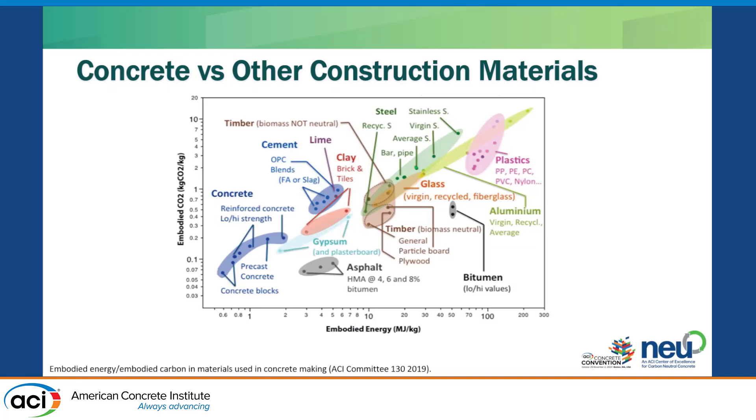So concrete, right? Compared to other building materials, other construction materials, if you look at embodied carbon on the y-axis here, embodied energy on the x, so how much it took to make it, concrete and cement are pretty low relative to some of these other materials. I think a lot of people are often confused by that. You see that and you say, oh, maybe it's not so bad. And of course, we all are here for concrete, right? So pro-concrete, but it's kind of interesting to look at that.

But when you consider that we're producing lots and lots and lots of concrete annually, then the carbon issue becomes big, right? This is global Portland cement production from the 70s through more recently. You can see it's increasing, bouncing around a little bit, but it's really high, right? Over 4 billion short tons of Portland cement, and this is just cement, making up maybe 12% of concrete. So that's a lot of concrete that we're continuing to produce.

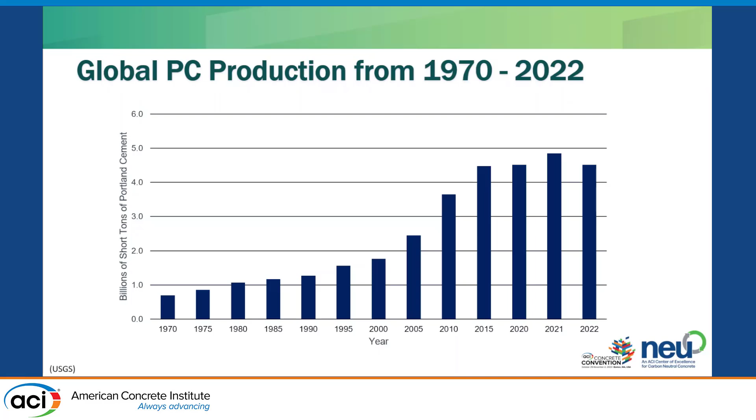So the carbon footprint, you hear between 5 and 8% of global anthropogenic CO2, and that's an issue. If you look at specifically what the materials are in concrete that are causing this high carbon footprint, Portland cement, of course, is one of the highest ones, right? Compared to some of the other materials like metakaolin, slag, silica fume, etc., the aggregates, air entrainers, some of the other admixtures can be a little bit high, but Portland cement is largely the biggest target that we should be going after.

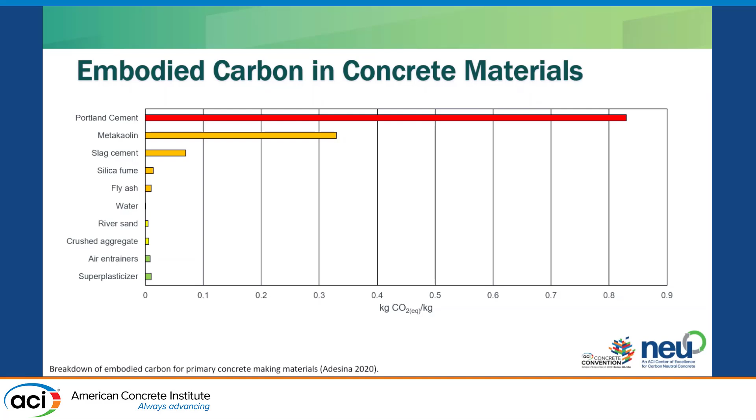So one of the questions you kind of have to ask yourself if you're trying to look at Portland cement and trying to reduce that carbon footprint is, where does the carbon footprint come from, right? Specifically, in the production of Portland cement, I think probably most of us know what this kind of situation is here.

So, typical cement kiln, right? We have raw materials coming in on the left, namely limestone or some form of calcium carbonate, shale, clay, various other materials. Now the kiln is at an angle, rotates real slow, and there's a huge flame at the bottom, right? So as the materials go through, they start to heat up. You lose the water, eventually the limestone hits a certain temperature, and you start to lose the CO2 from the limestone, right? So that's just sort of a natural chemical reaction that happens when you heat limestone, but it contributes a significant amount to the total carbon footprint.

In addition, those materials inside that kiln need to get to roughly 1,450 degrees C, which is very hot. So we're burning a lot of fuel in order to keep that flame at the temperature it needs to be. So those are the two primary activities that are responsible for that carbon footprint.

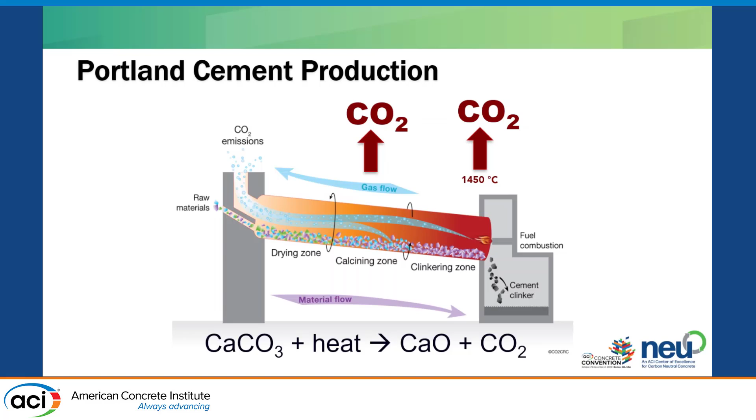Shrika mentioned earlier, there's all sorts of people on the case, right? We have ACI, PCA, all the letters working on this, which is good. And if you go online, which I have been, I'm working on this document, I'll talk about it in a few minutes, there's all sorts of roadmaps. Very cool, and a lot of them are generally heading in the same direction.

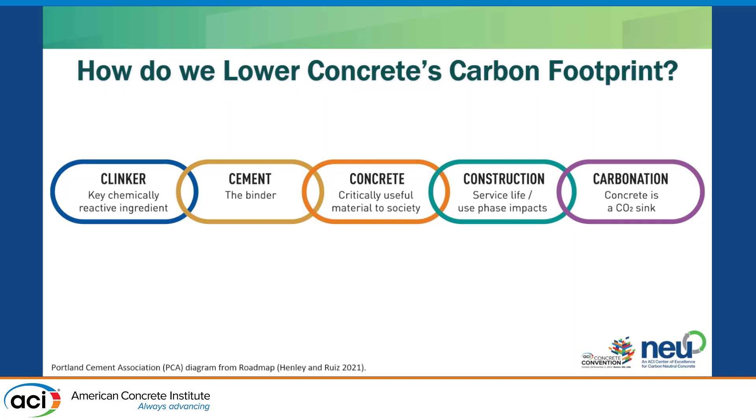So this is PCA's 5 C's, right? Start at the beginning, reduce clinker, reduce cement, reduce concrete, have more efficient construction, and then you get to carbonation. So pretty basic. This is GCCA.

I think Shrika actually had it. We should have coordinated, I'm sorry. She had it in bullet points. Here it is, the graphic.

But looking at what do we do, right? It's kind of interesting to look at this. Savings in clinker production, right? So looking at the plant, what can we do there? Efficiency in concrete production, optimize mix design, optimize your aggregates, right? And those are like 11 and 11%.

In the salmon, I don't know what color that is, Portland cement substitution, right? So now we're looking at alternative cements, alternative SCMs. They're saying that's 9%. That's pretty interesting. Decarbonization of electricity.

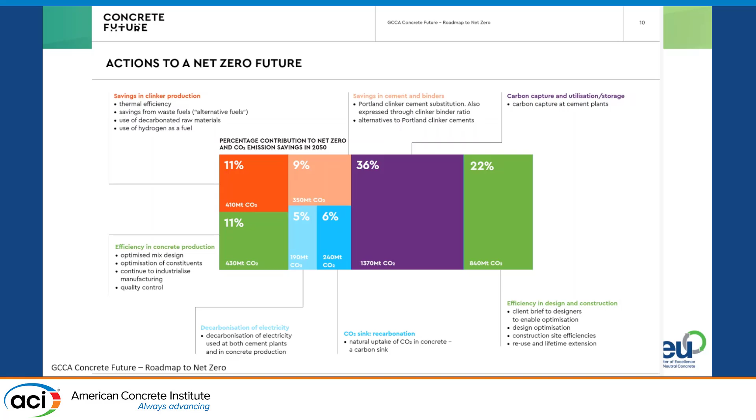And then recarbonation just naturally from the concrete. And then they have a huge area here for CCUS. I mean, that's interesting, I think. And then efficient design and construction. So it's interesting to see sort of what everyone is looking at moving forward.

This is from the California Nevada Cement Association. I really like how they organized it. This came out just this year. So they're looking at these emissions in three different categories.

The first, process emissions, saying okay, that's sort of like the limestone calcination, right? What can we do? They're saying blended cements, CCUS, alternative cements, and clinkers. And then they break it apart into combustion emissions, saying okay, at the plant, right, what can we do? We can burn different fuels to reduce that carbon footprint. And then further looking at waste heat recovery, renewable electricity, in terms of reducing that.

So I kind of like how they organize that. But it's interesting to see, you know, looking at kind of near-term versus long-term versus mid-term solutions, kind of what's here now, what's coming.

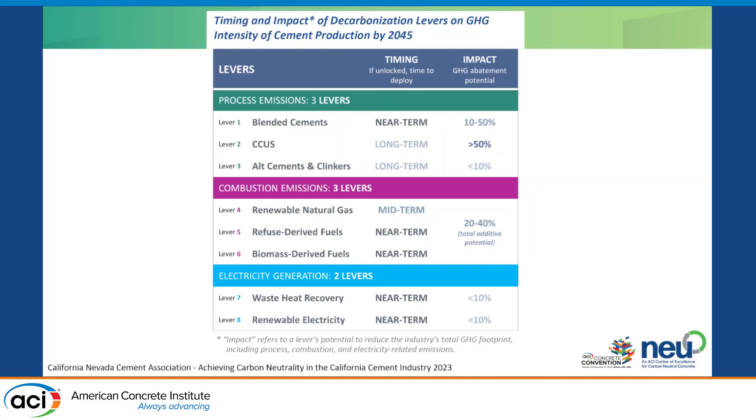All right, so anybody that's here that's been working on the sustainability, resiliency of concrete, however long, it kind of always starts with sustainability and resiliency. And I teach a class on sustainability, and we spend a whole hour talking and saying, what is that? What is sustainability? What is resiliency? They're really big concepts, right?

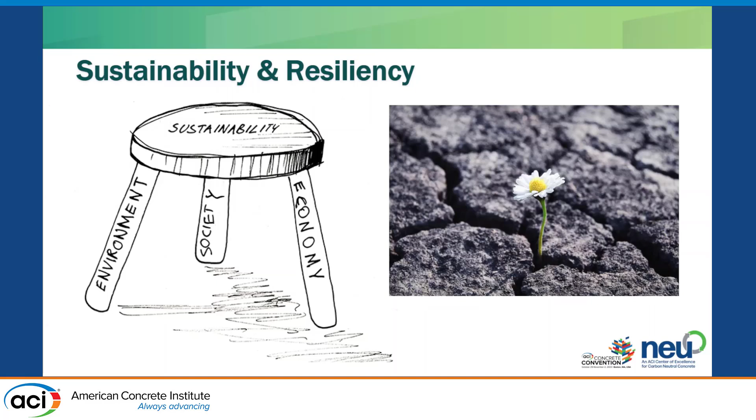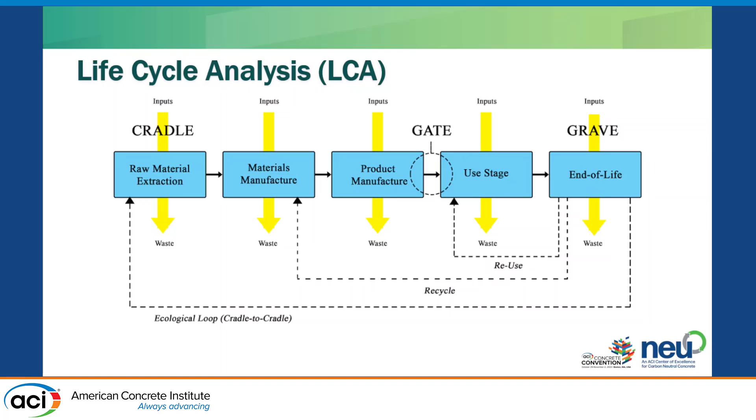Well, finally, or not finally, but we're narrowing it down, right? And like Sarika said, we have to measure things, right? We have to get numbers. And so we're relying on LCAs now. We're relying on EPDs to give us some numbers so that we can make decisions based on data. And that's a really big deal.

All of this is leading to the low carbon concrete code. I almost started asking questions to you like I was in class. Sorry, that would be weird, calling on people. Anyway, coming to this code, right?

So there's a lot happening right now. It's very exciting. So I'm going to talk a little bit about just sort of the materials that are out there right now, what's maybe coming down the pike, and then what are some of the questions that we need to be asking as we start to embrace these new materials.

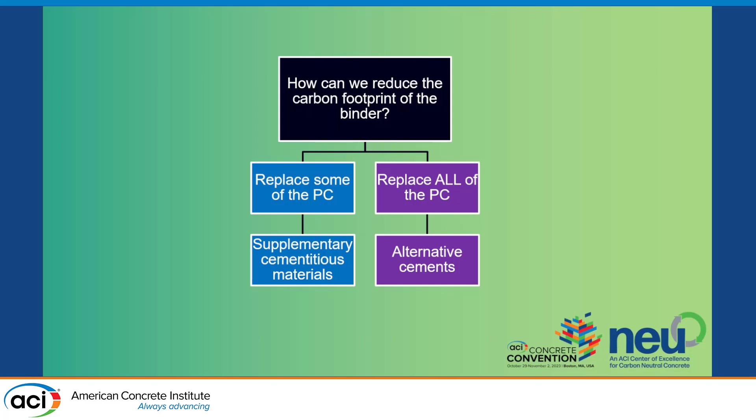So this is sort of how it used to look, right? How can we reduce the carbon footprint of the binder, replace some of the PC, replace all of the PC? Now we're saying, okay, we can also recapture some of the CO2, right, through CCUS. We're expanding it even more.

How about we make ASTM C150 Portland cement, but in a different way, right? This little chart could just keep going on and on and on. There's all sorts of new stuff coming out. Pretty cool.

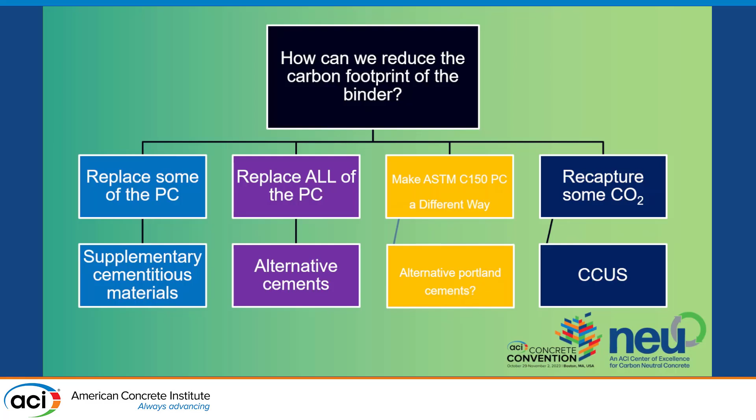So SCMs. So probably you're like, oh great, SCMs again. Yeah, everybody knows. But the thing is, they're here now. We know how to use them. They work pretty good. It's a pretty direct, let's get rid of a certain amount of PC, put in something else, right? Lots of different SCMs.

ASCMs are alternative SCMs, so there's the classic sort of traditional ones out there, and then there's a lot of other ones being developed. There's a lot of test methods being developed so that we can use additional SCMs moving forward. That's a big deal.

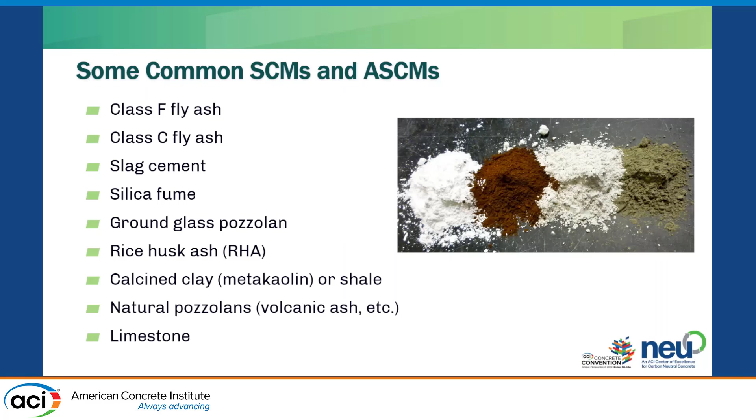As most of you, I have no idea what this audience is. Probably some of you know, right? When you're looking at SCMs, they're not all the same. They're different. You have to know what they are made of chemically. You have to know what the particle size is, where is it available geographically, and they behave differently, right?

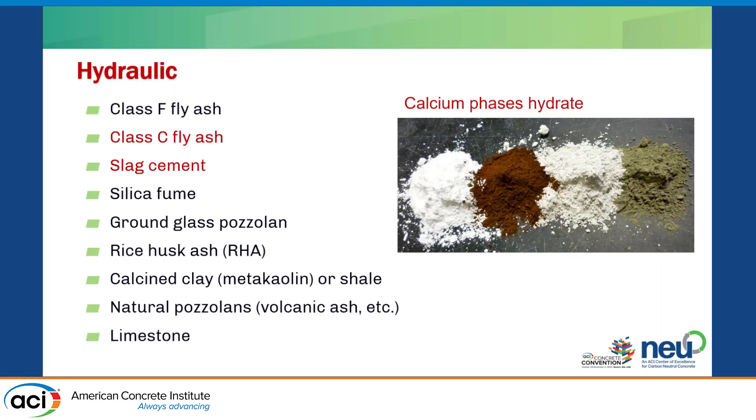So SCMs that are higher in calcium tend to be hydraulic. Class C ash, slag cement are good examples of those. If you add water to it, it gets hard on its own, right? You're going to have a little bit higher replacement level with those. Also pozzolanic, right? Many of these materials are pozzolanic. They're rich in silica or alumina, right, to form, reacting with calcium hydroxide from hydration to form more CSH.

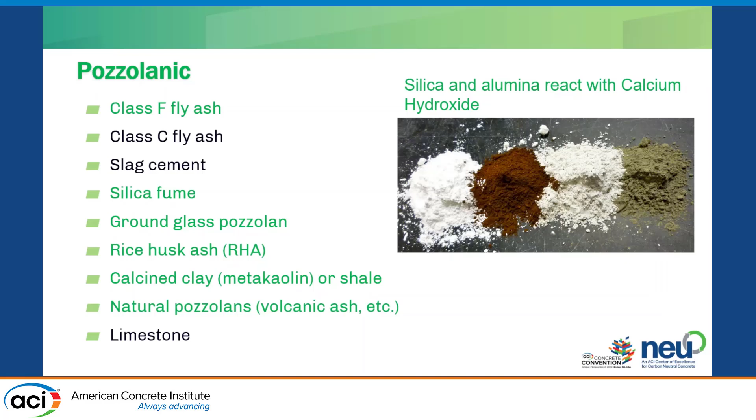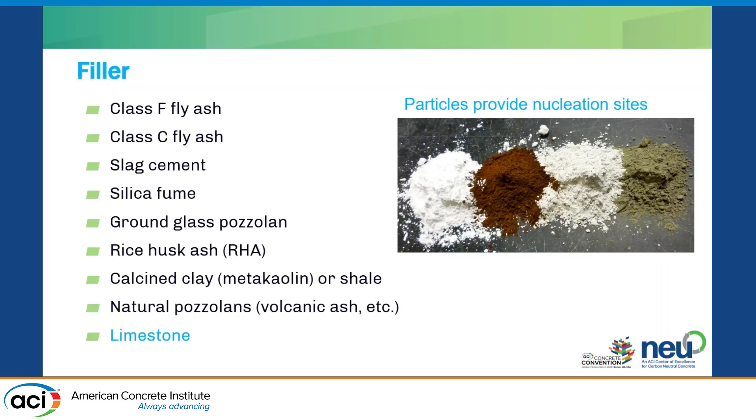And then, I don't want to argue with anyone. Is this a filler? I don't know. This is what I put on my slide, but right, limestone is out there too as a big one, right? We know, hearing a lot about limestone, but it used to be sort of a filler grinding aid. Right now we're saying, man, it does some things to the concrete. What is it doing? How does it work? Maybe it's nucleation sites, but it's a material that's going out there replacing some of the Portland cement.

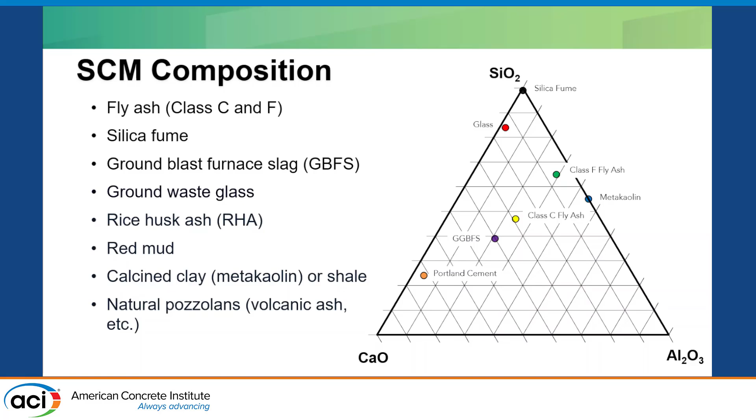When we're looking at these SCMs, and these are sort of the classic or the ones that have been around, we're looking at composition. That's really big, right? Calcium, alumina, silica, where does it land relative to others? And then we can kind of get an idea of how it's going to be.

So fly ash, right? Ash that goes up into the air from coal-fired power plants, of course. It's the big one, right? Most people's favorite, I would say. And it's really great, right? So this fly ash is a good example of how complicated it is when you look at these alternative materials or newer low-carbon materials.

So fly ash, at first glance you say, okay, I'll replace 20% Portland cement with fly ash, great. But fly ash particles are super spherical, right? They have this ball-bearing effect, allowing you to maybe make your mix with a little bit less water. So now you have a more dense mix, a more impermeable mix, a more durable mix, right? How do you quantify that? Maybe that mix is going to last longer, need less maintenance. So there's more to it than just looking at direct replacement, and that's something to think about.

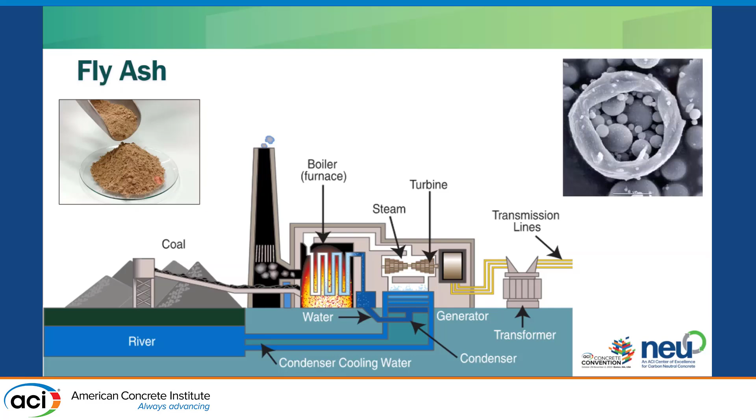I think we're all aware that fly ash availability is changing. Coal-fired power plants are being shut down, and that's good for the environment, maybe not so good for the concrete industry, but it's pushing us to look at other materials, right?

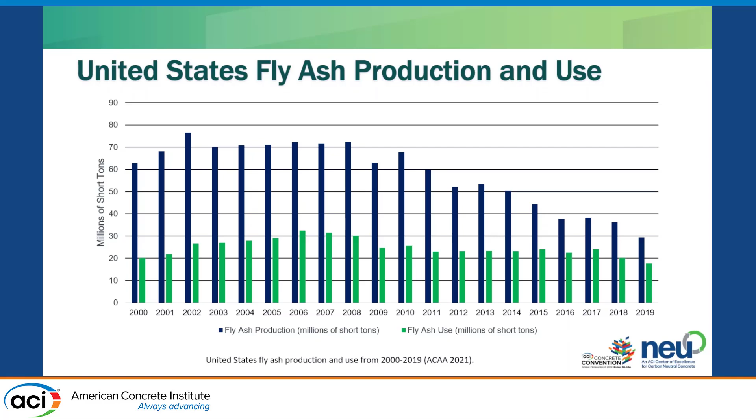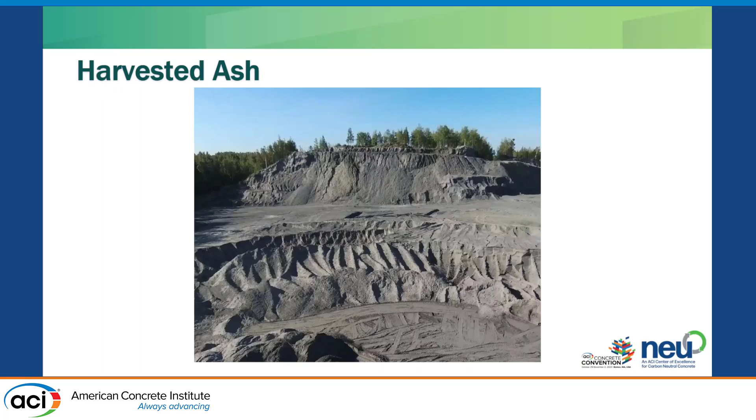There are a lot of other materials out there, also lots of harvested ash, right? So I think we've been using fly ash in concrete since the 70s. Before that, they'd throw it away. Since the 70s they started to use it, but they were still kind of, I'll take the good stuff and throw the bad stuff away - high carbon, high alkali, whatever, right? And now they're like, where did we put that? Go get it. So there's a lot of harvested ash out there, and really great work being done processing that and making it successful. So that's a pretty big one.

Slag cement, of course, is out there. Works great. Not available everywhere, right? It's sort of available where you're doing steel or iron work - sorry, should know iron from the Iron Range. But it's not available everywhere, so sort of where you are matters. If you're wanting to use slag but you're not near slag, transporting it is going to really cut into any kind of reduction.

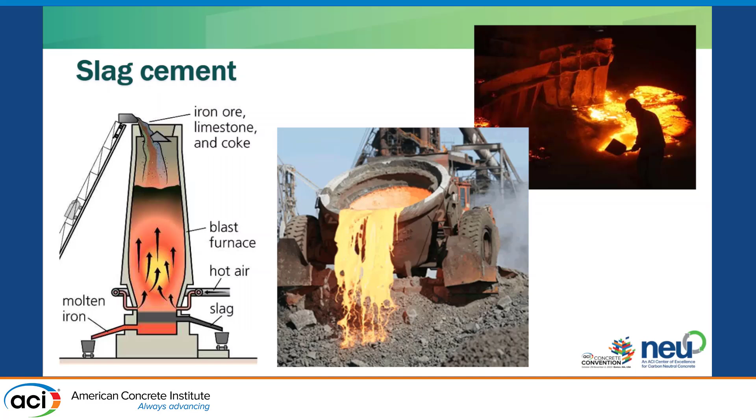Silica fume is another big one, right? Kind of similar to fly ash, I'd say. Made from the ferrosilicon industry, tiny little particles, spherical. I think I've read twice as fine as cigarette smoke. Does amazing things in concrete - tiny little particles relative to massive cement particles, you get this really great packing, really dense, nice bond between aggregates and paste, etc. So you get really good concrete from using silica fume.

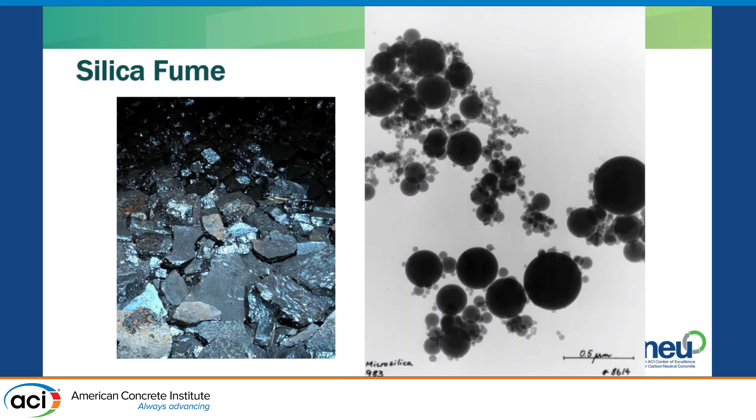Ground glass pozzolan is sort of one of the newer classic SCMs. ASTM came out with a standard in 2020, and a lot of work has been done on glass pozzolan. One of the things about ground glass is it's available - we're all drinking beverages, eating pickles, right, everywhere we are, and so there's glass all over the place. It's not being produced everywhere, but there's the potential for that to be more regional.

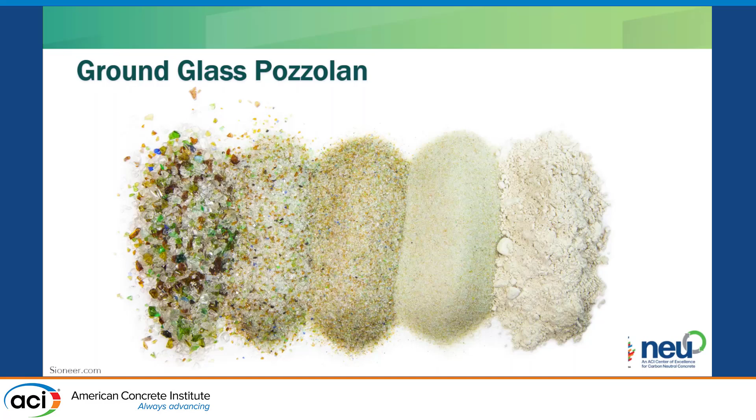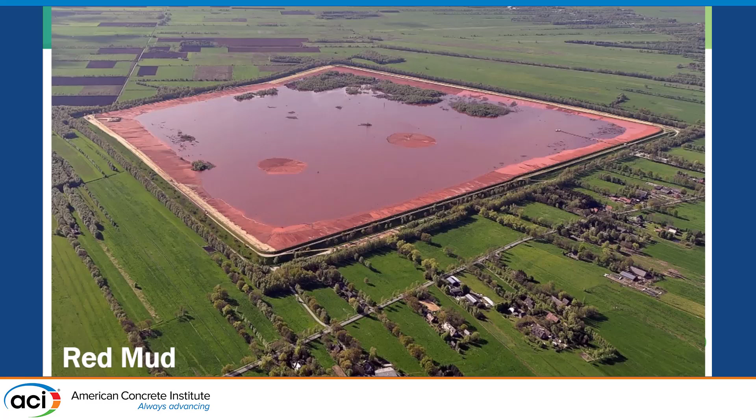And then we have some alternative SCMs - red mud from aluminum ore mining, rice husk ash, all sorts of other materials that are being considered. And a lot of this has to do with where you are, what's available.

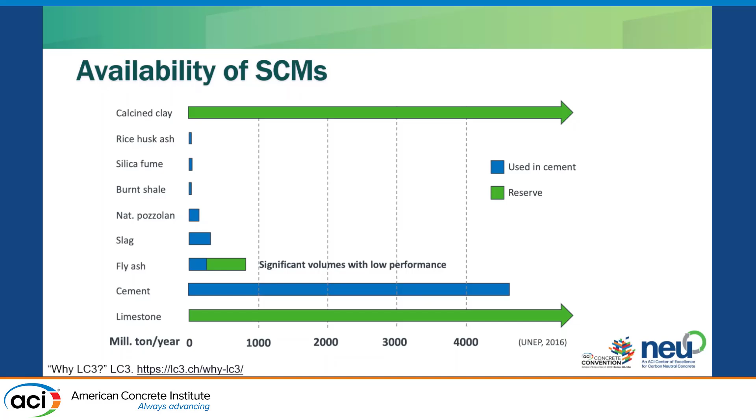So you look at these materials and you say, okay, they're great, but there's not a lot of them out there. So a lot of folks, Karen included, are saying, what about calcined clay? What about limestone? These are materials that are out there abundantly around the whole world.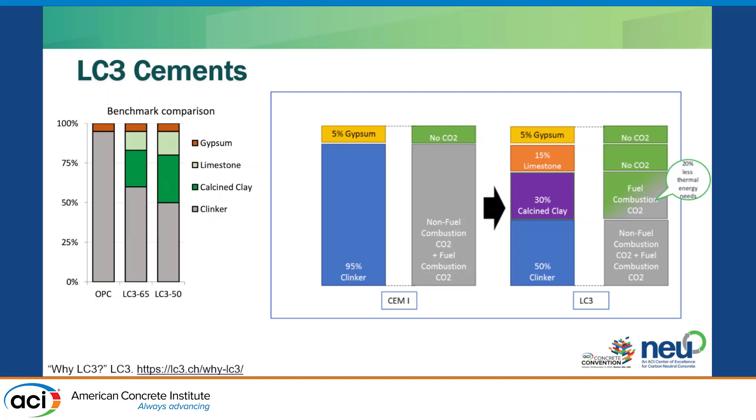And so she's been working on developing the LC3 cements, based on some clinker, or Portland cement essentially. On the left, Portland cement, and then she's saying let's put in some limestone and calcined clay to replace that, either at a 50% or a 35% replacement level. On the right here, you can see putting in the limestone, there's no CO2 emitted. Putting in the calcined clay does need to be heated, but not as hot as Portland cement, right? And so you have a lot less emissions, and so that's really taking off.

Blended cements, of course, all different types, right? Blending Portland with slag, pozzolan, limestone, or ternary blends, which are sort of DIY, your own mix. I think we all know type IL is really here, right? It's here. Here are all sorts of things. But that reduces some of the Portland cement right off the bat, okay? And it's been around for longer in like Europe than here. And so every time something new comes on board, there's always growing pains, always sort of a learning curve.

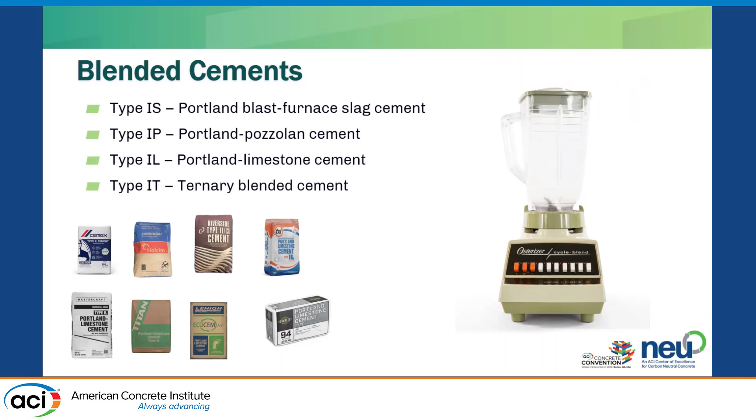Ultra high performance concrete is a big one right now. If you're not familiar, it's very strong, very durable, very impermeable. Can get as high as like 32 KSI. Made based on particle packing, so there's no coarse aggregate at all. It's all fines, just packed really, really tight, right? Really low water cement ratio. And you can see in the picture on the left here, it behaves a lot differently than normal concrete.

UHPC, you're probably thinking in your head, yeah, but you put a lot of cement in it. Okay, fair, you do. You put a lot more cement in it than normal concrete. But it allows for very efficient design, right? So on the right you can see UHPC versus some of the other more traditional structural engineering options. A lot more efficient for the same load or same span. A lot lighter, okay? Lighter means lower transportation costs, means smaller cranes, means larger clearances, smaller, shallower sections, etc. So you can get a lot of efficiency that way.

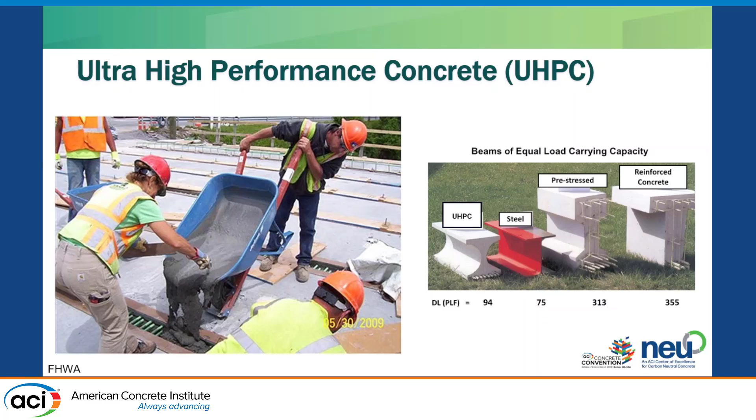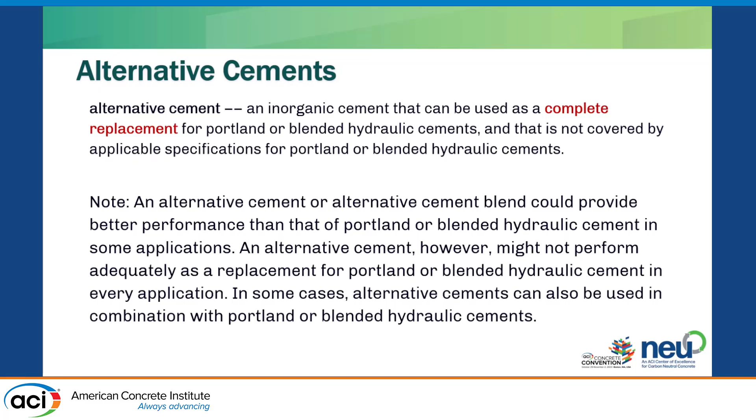So when we start looking at all these materials, there's a lot to consider. Alternative cements, like I said, we replace some of the cement, or we replace all of the cement. I won't read this, but this is from 242, the Committee on Alternative Cements, essentially saying that an alternative cement is a complete replacement of Portland cement, except if you need a little bit of Portland cement. But okay, so it's a full replacement.

Have I been talking for 18 minutes? That's what it says. A little bit.

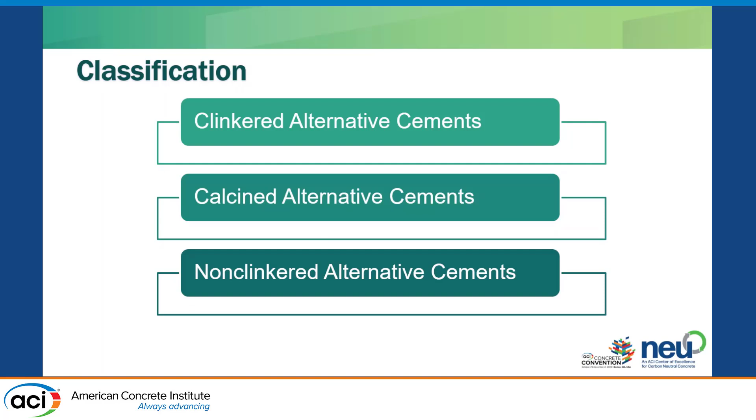Okay, clinkered alternative, calcined and non-clinkered. In the ITG that was before 242, that doesn't matter, but we looked at trying to classify all of these different alternative cements. So there's a very wide variety of chemistries out there, which is awesome, but also complicated. You can't just say do this for Portland and do this for alternative cements. They're all different, right? They all need to be handled differently.

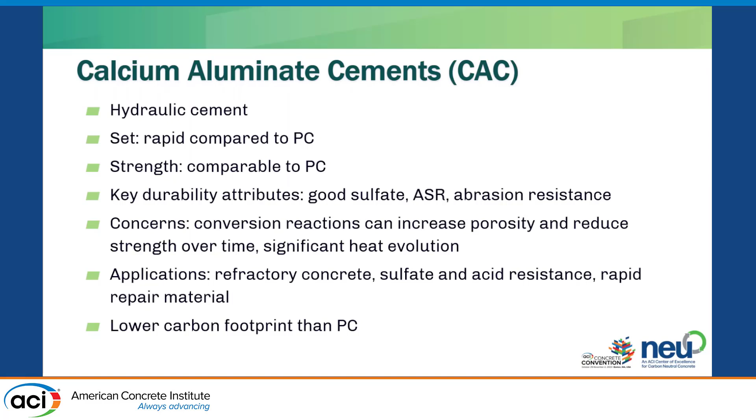Calcium aluminate cements, I won't go through this whole thing here, but are hydraulic cements typically have a lower carbon footprint than Portland cement. Applications include refractory concrete, rapid repair material. So that's the other thing to consider, is that there's a lot of alternative cements out there. It doesn't mean that they're all direct replacements for Portland cement. Portland cement can be used in a number of applications, as you know. Calcium aluminate cements, maybe not a direct replacement. Just an example though, there was rapid repair of an airport runway in a cold climate in Norway. They had about 15 minutes for set time and got 5,800 PSI after 6 hours. So some of these cements, while they don't replace Portland directly, have really amazing properties.

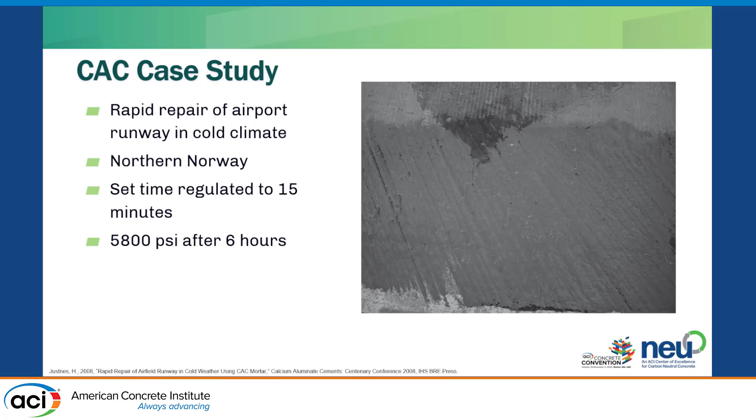CSA, calcium sulfoaluminate cement, a big one. There's a bunch of magnesium-based cements. Alkali-activated cement's the one that we hear about frequently. This is probably the closest one that can replace Portland cement or be used in many of the same applications.

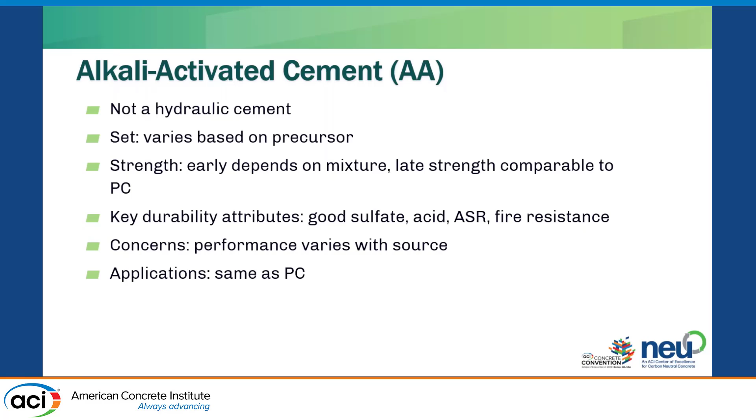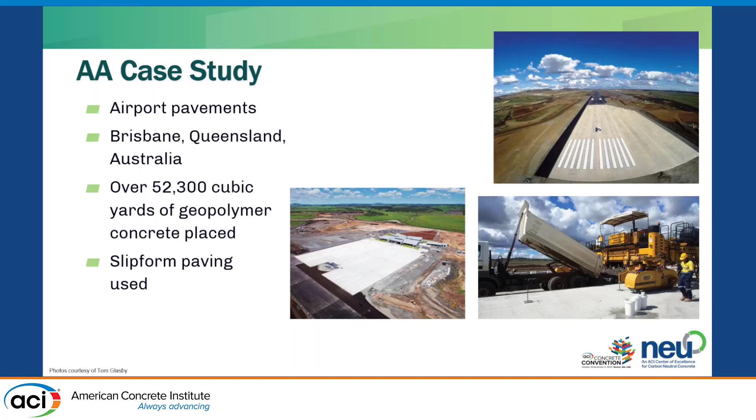This is a case study from Australia. They did a whole airport pretty much. They did pavements, bridge, curb, the pad. They did it all out of alkali activated concrete. They're doing a lot of work. I think they just came out with a standard for alkali activated cements - Doug's nodding - in Australia. So they're moving really good on that over there.

Just FYI, in case you're interested, ITG 10 came out with a report on alternative cements. There's also a practitioner's guide. The report has more academic information, while the practitioner's guide has case studies much more clearly presented, covering these different materials. It offers a review from the report, plus a section on what you need to consider if you're looking at an alternative cement, since there's a lot of questions that need to be asked. In addition, we just came out with an alkali activated cements report if you want more information on that specifically.

So, carbon capture, utilization, and storage. We saw that this was a key player in many of the roadmaps we've seen. This is just from Wikipedia here. I've talked to Sarika and several other people about trying to make sure we're all on the same page in terms of what's what. But essentially, there's a lot of companies out there right now looking at trying to pull CO2 either from a specific industry, such as the cement industry, directly from there, either storing it or using it somewhere, or capturing CO2 from the atmosphere.

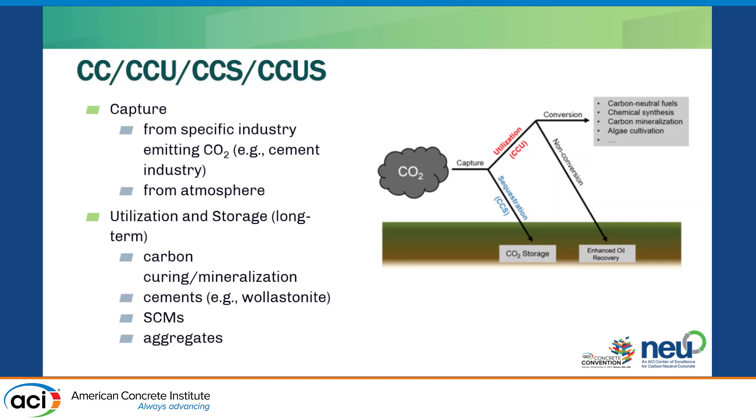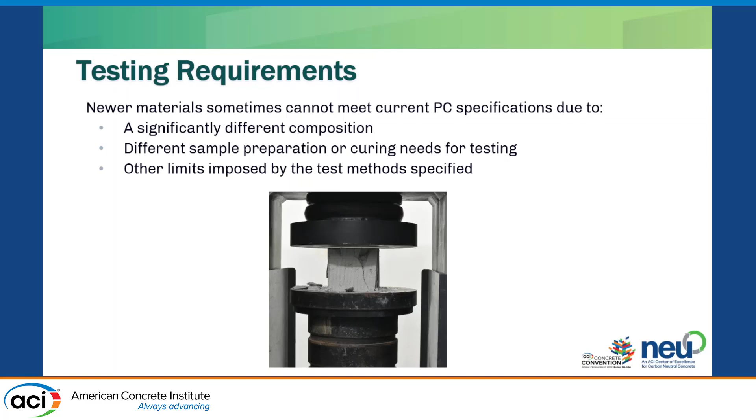So some of the challenges as we look at these new materials include testing requirements. ASTMs written for Portland cement do not always exactly apply to some of these newer materials. For example, alkali activated cements might need a little bit of heat cure, and ASTM C109 doesn't allow for that. Otherwise it works. I think ASTM just fixed that, but there's lots of questions out there, so lots of things to consider.

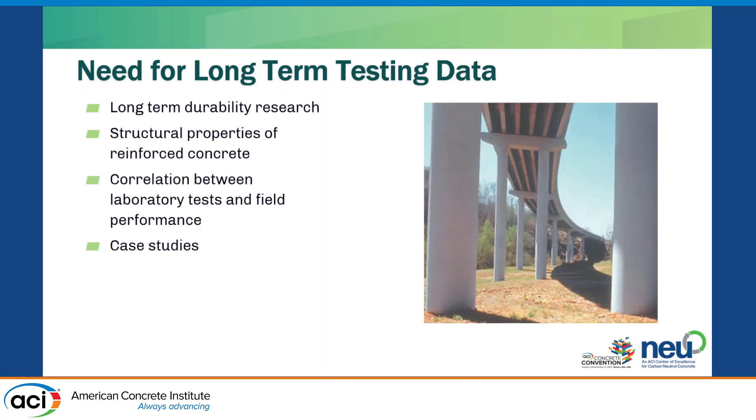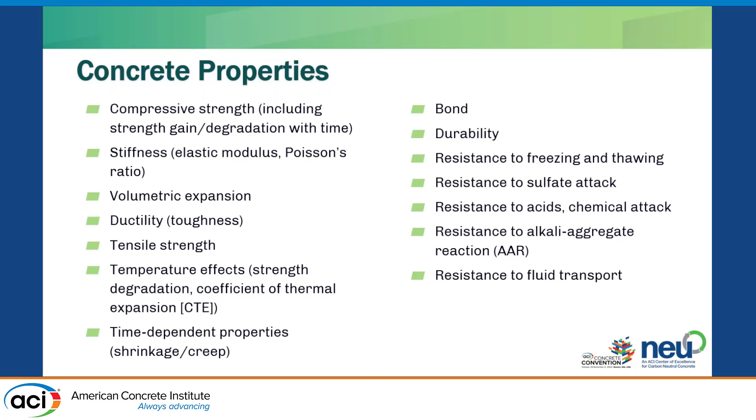Long-term testing data is one of the things a lot of people are looking for. When you're looking at any kind of construction having to do with life safety, you're saying, where's the data, where's the proof that this is lasting a long time? All sorts of cement properties need to be understood with these new materials - there's a list here - and concrete properties as well. Lots of questions to ask. But I think the companies out there are learning a lot from things like ACI and starting to answer all these questions.

So one of the things I've been working on, doing a little bit of consulting, is a low carbon concrete materials company survey, trying to reach out to all the companies out there. If you're a company and I haven't reached out to you, please reach out to me - happy to have you be part of it. We're trying to find out what's going on out there, what the companies are doing, and these are some of the questions we're sort of asking.

So what's the technical readiness level? Are you starting up, are you in lab doing stuff, are you actually producing, when are you going to be available, where are you available, what are you making - an alternative cement, a reinforcement, other materials? What's your potential application? What's your global warming potential? Have you done an EPD? And then roughly, what's the cost?

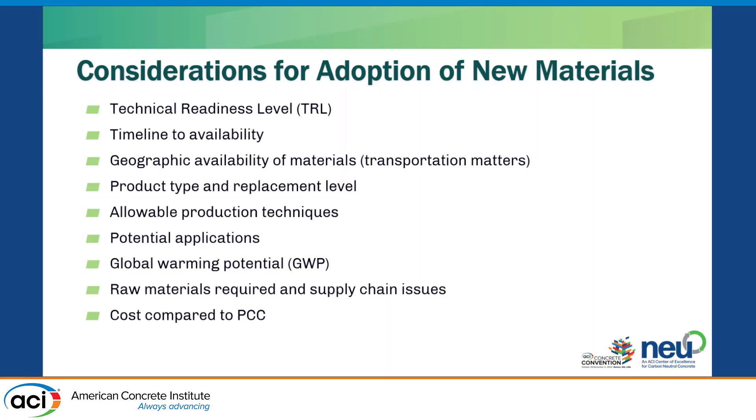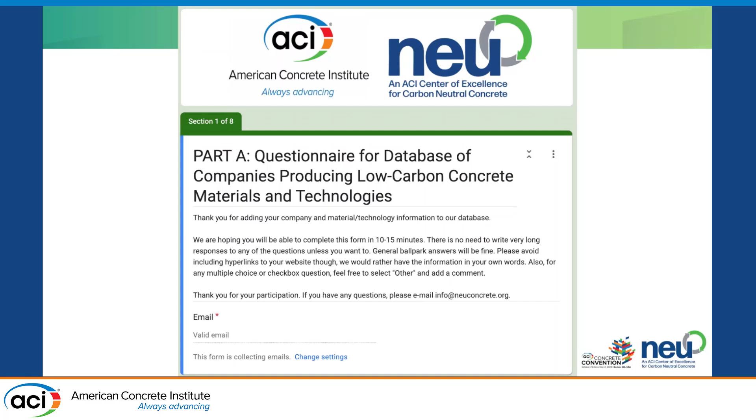It's been really interesting to see what's coming back, and there's a lot of really awesome technology out there. So we're working on that survey - there's two parts. Part A is pretty quick, and Part B is a little bit more in depth, just to get a better idea of what you're up to. So again, if you haven't already and are part of a company creating low carbon materials, please reach out, because we'd like to capture that to move on with its mission and vision.

I'm also working on a strategic concrete materials guide that's coming very soon, and I hope to include all of this, plus more details on some of these newer technologies in a generic way, as well as water, aggregates, reinforcement, etc.